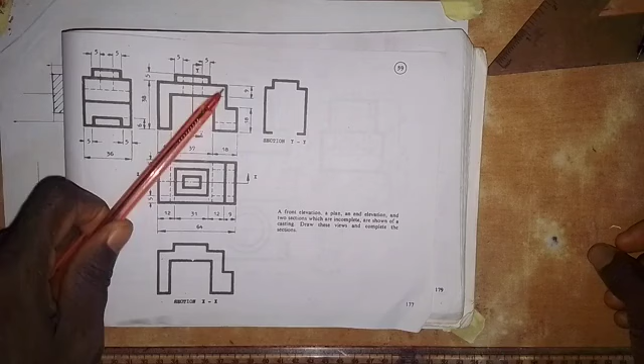So for the section XX, as the cutting plane goes like this on the plan, what we are to do is to draw the front elevation and we add the solid part. So though we have been given the part that we are to produce for section XX here, we still need to make use of dimensions on the front elevation to produce this, and then we add the solid part.

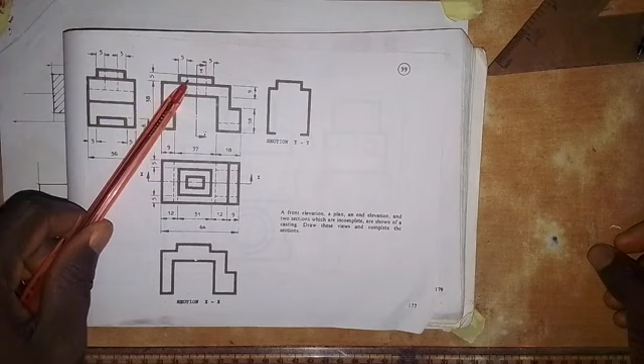Okay, and then we also have section YY. So this is the cutting plane YY here. So we cut off this part, so what we are going to do is to draw the end elevation, and then the part of it is given to us here that we are to draw. So let's start and see how this can be done.

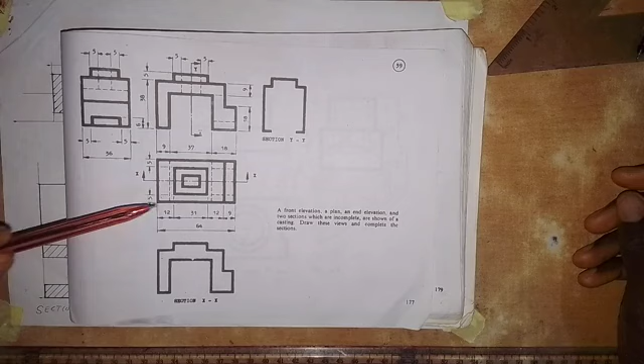So for section XX, as I said, this is the cutting plane. So we cut off this part as the arrows go in this direction. So we want to see what we have left on this surface. And then, looking at this, we have a rectangular hole here. So by the time we cut it, this line that is hidden within this will be exposed.

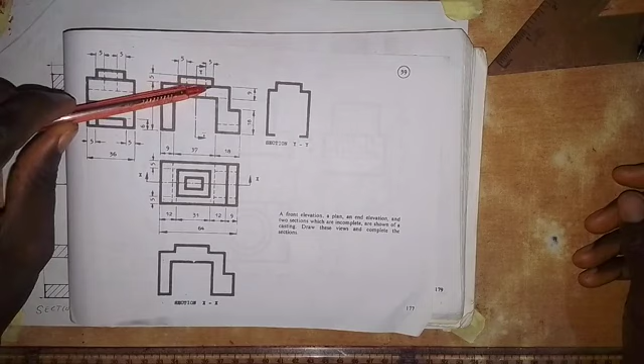So we are going to have it drawn with a thick line, and this line will not be there again. Okay, so we are going to draw it from here to here and from here to here, but it will not cover the whole of this space. As you can see here in the section XX that we are given, we are just to replicate what we have here, and then we need to add the solid part of it. So let's start and see how it goes.

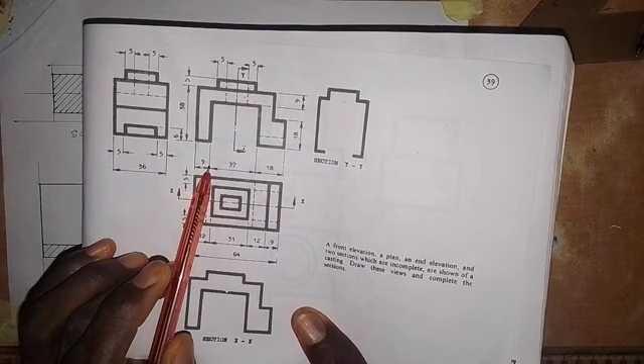So as we have from here, for the dimensions, from here to here is 9 millimeters. From here to here is 18 millimeters. From here to here is 37 millimeters. And the height from here up is 38 millimeters. From here to here is 5 millimeters.

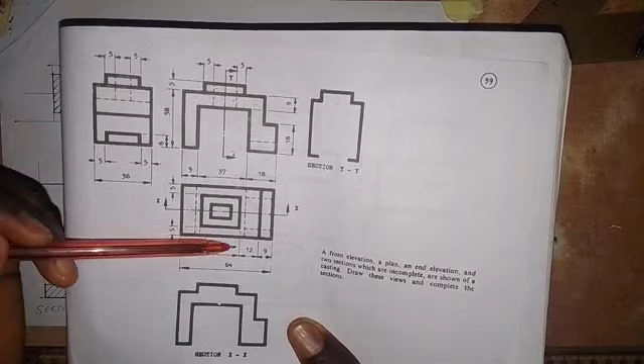And then we also have that from the center here, from here to here is 5. Okay, and from here to here is 5. And the length from here to here is 31 millimeters. It's given in the plan. So the total length is 64 as we have here.

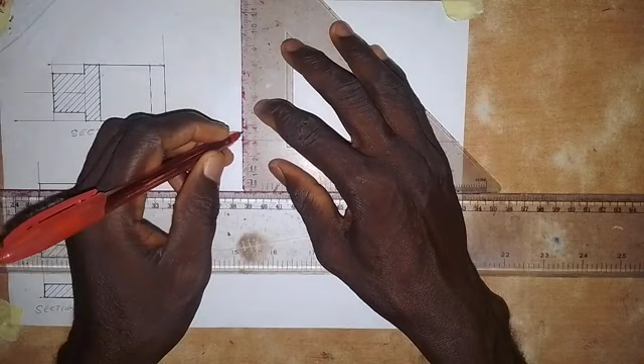Okay, so for the section XX, I'm going to draw a horizontal line here. So we draw a horizontal line like this. At this point, I'm going to draw a vertical line. So it goes up like this. Okay, so with this vertical line that I've drawn, I'm going to be taking measurements. I will take a measurement of 9 millimeters. So this is 9 millimeters here.

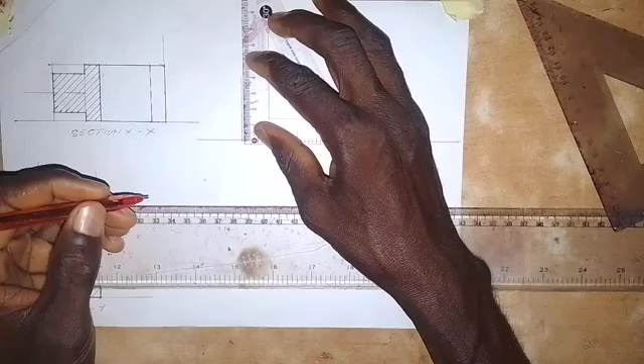Okay, so from this 9 millimeters, I will take 37 millimeters. So this is 37 millimeters here. After this 37, I'm going to take a measurement of 18 millimeters. So this is 18 millimeters here. Okay, so we have this. Then I will come on this line and take a measurement of 38 millimeters up. So let me extend this a bit.

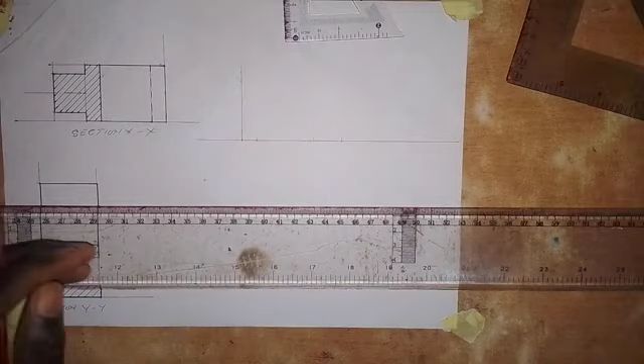38 millimeters. So this is 38 millimeters, and I will take 5 millimeters from here. So 5 millimeters up. So this is 5 millimeters. Okay. All right. So there is a particular dimension that I have to take: we have that from here to here is 18 millimeters, and from here to here is 9 millimeters. So from that 38 down, I will take 9 millimeters down, so it is within that 38.

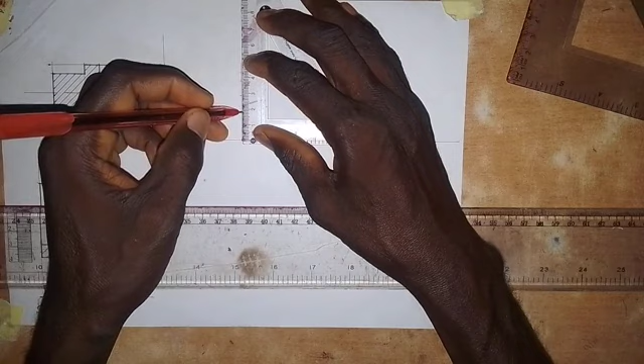So we have this, and I will come here and from here up, I will take 18 millimeters again. So this is 18 millimeters. Okay, so I'm going to draw horizontal lines from each of these points.

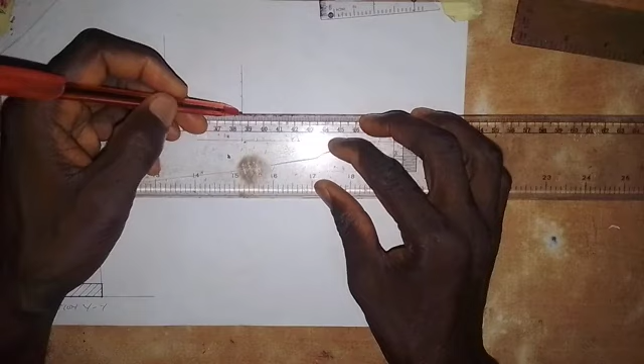So we'll draw a horizontal line from here. So draw a horizontal line from here to this side. Okay, then coming here, I will draw a horizontal line, and at this point I will draw a horizontal line here like this. Then coming up here, I will draw a horizontal line. All right, so then

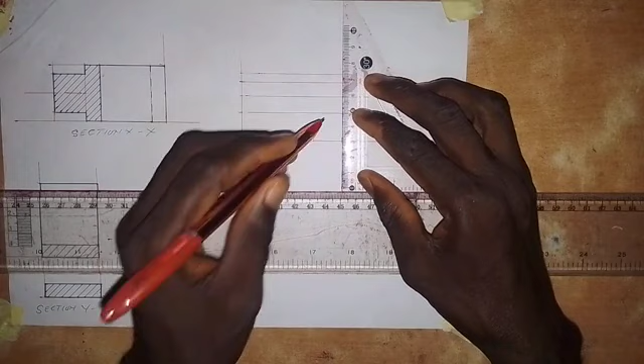Here I will draw a vertical line. So from this point I will draw a vertical line here. Okay, so this is a vertical line, and also at this point I will draw a vertical line that will touch this line. So based on what we are given, and also at this point I will draw a vertical line that will touch this line from here to here.

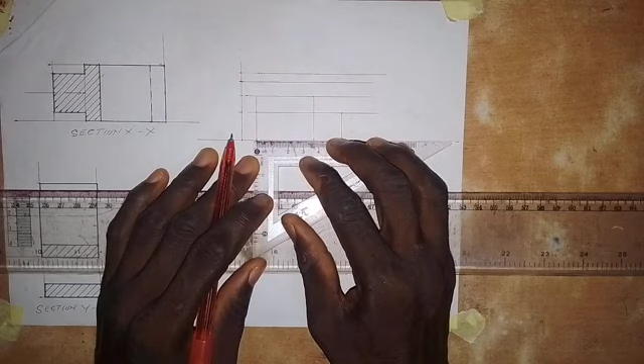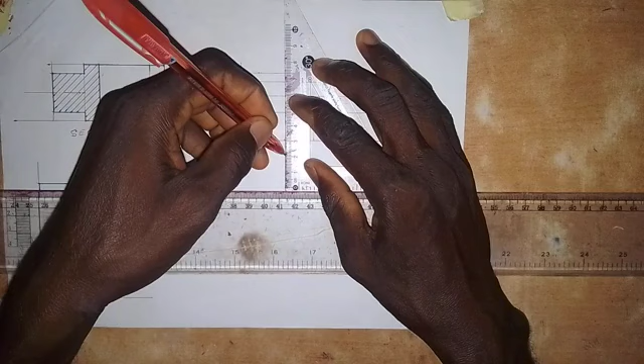So we have this. Okay, so then this 37 that we have in the middle, I'm going to divide it into two. So 37 by 2 will give us 18.5. So 18.5, this is 18, so 18.5 here. So I'm going to draw a vertical center line here. So we draw a vertical center line, so it goes like this. Okay, so we have that now.

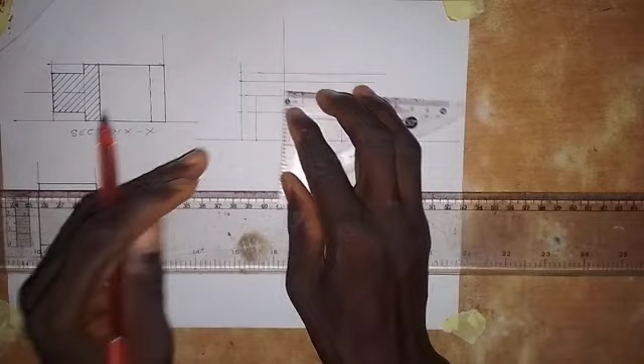Then from the center, we have that the total distance from here to here is 31. So if I divide 31 by 2, that will give me 15.5. So I have to take a measurement of 15.5. So I'll just set it like this. So this is 15.5, then 15.5, so making it 31 millimeters.

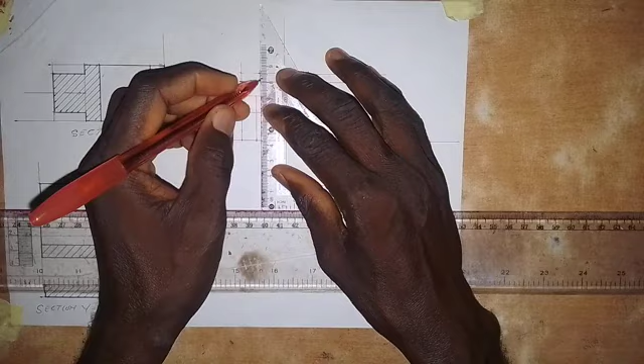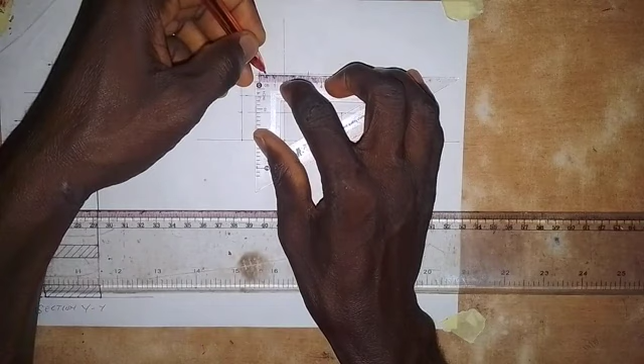Okay, so I'm going to draw a short vertical line to touch this one here, and also a short vertical line here to touch this one. So we have this. Okay, then for us to get the hole inside this, which is a rectangular hole, we have to take a measurement of 5 millimeters from here to here, because we are going to see this line and we are going to see this line. So I have to take 5 millimeters from this point to this side. This is 5 millimeters, and from here I will also take 5 millimeters.

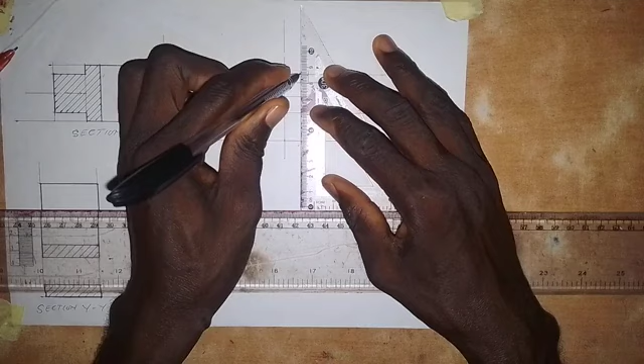So we are going to draw the line. Let's see where it ends. So it goes from this point to this point here. So we are going to stop it here. And then we are going to make it a thick line. So that is from here down. So we draw it, making it a thick line. And then here also we draw it, making it a thick line from here to here.

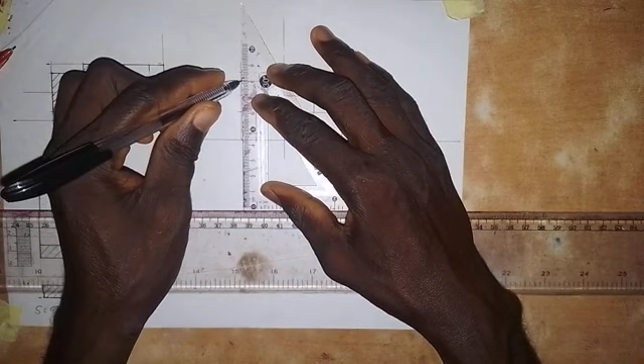And this line also, we have to make this line a thick line. Okay, so this line on this side will be a thick line, from here down to this point. Okay, so then this line from here, we draw it as a thick line from here down, and then this line will also be drawn, making it a thick line. So this comes down to this point here as a thick line. So we also make this a thick line from here down here.

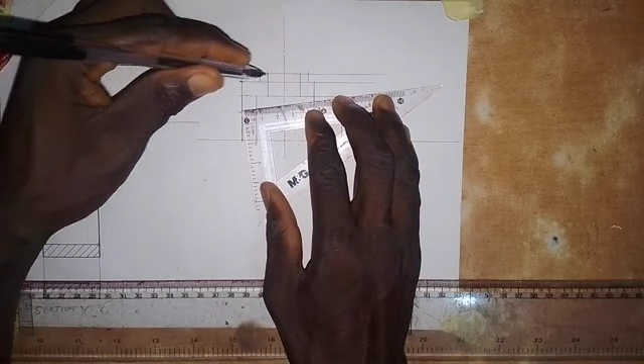And then this line we also... okay, so I'm looking at something here. All right, so from this 18 that we took here from here to here, we are taking 9 millimeters inward for us to draw this line, and that's what I've done while I paused the video.

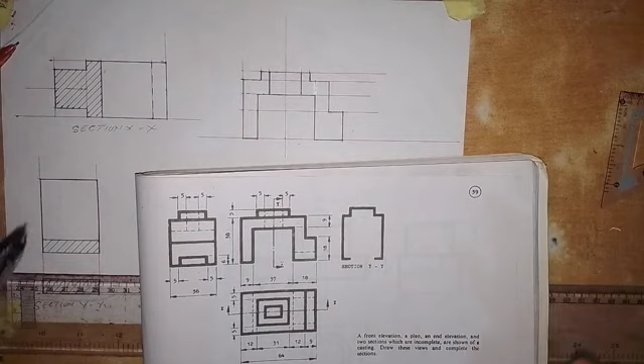So what we have now for the section XX is for us to produce the hatching lines on this surface. So this will not be hatched because there is a rectangular hole. The cutting plane does not touch this surface, so we leave it unhatched. But the rest from here down, we are going to hatch. So we make use of a 45 degree set square to produce the hatching lines.

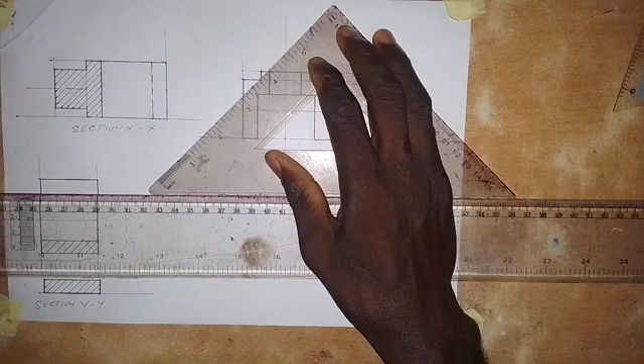As I said, hatching lines are drawn 45 degrees to the horizontal, and they are drawn with thin continuous lines, equally spaced. So you don't have to measure the space. All you have to do is use your eyes to take the distance between the hatching lines. Okay, so that is what I'm doing here, without taking the measurement of the space between the hatching lines. So we also hatch this, and then we hatch this surface.

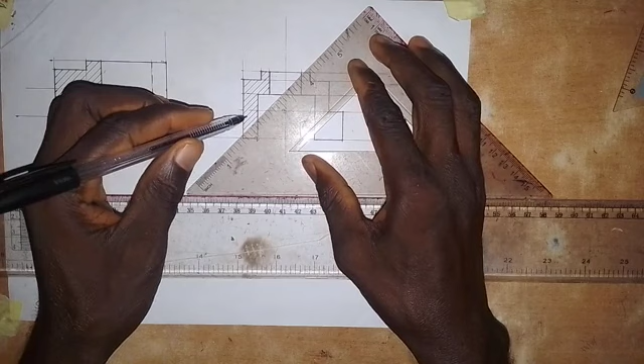All right, so it's as simple as I'm doing it here, so you don't have to think you can't do it. You can do it. Okay.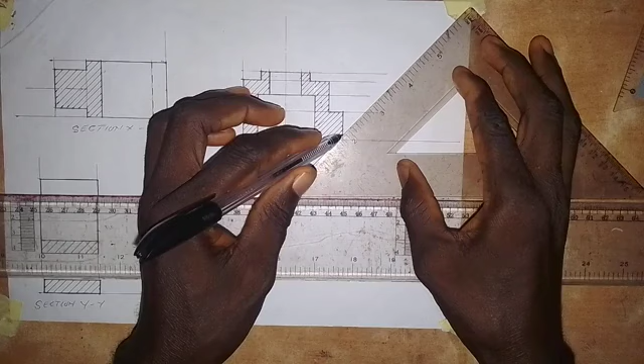All right, so we're about to complete this. Okay, so this is it. So this is section XX as we have here. So let's go and work on section YY.

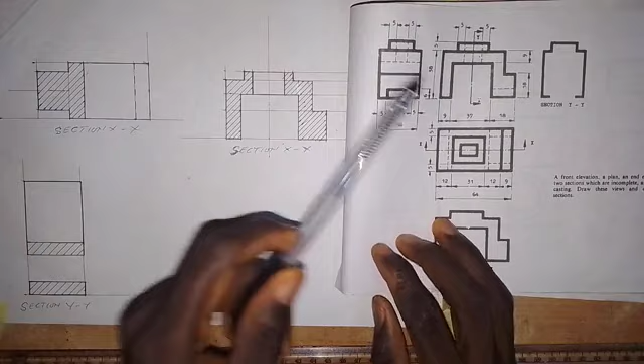So the cutting plane, we have it here, and the arrows go in this direction. So we remove this part. I want to see what we have left here on this face. Okay, so by the time we are looking at this from the plan, the cutting plane does not touch this face as we have here, so that's going to be left unhatched. And then this face, the cutting plane does not touch it, it's going to be left unhatched. Okay, let's work this out first.

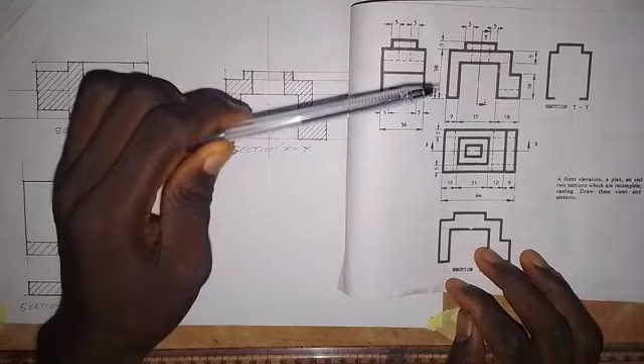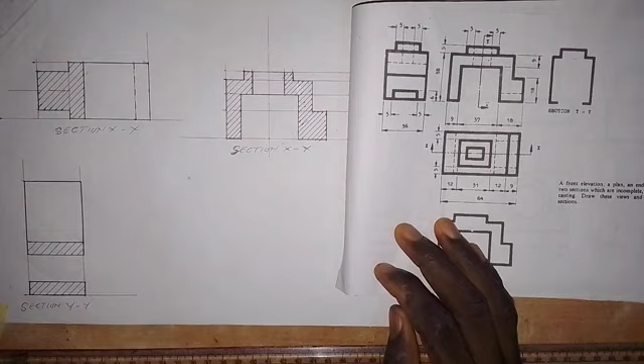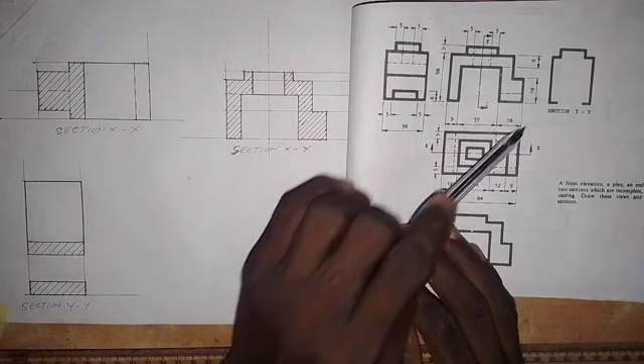So we are going to make use of dimensions on the end elevation. Looking at this as we have here, the distance from here to here is 36 millimeters. And then, other things that we are going to have here, there is a cut here. So we have a shape here, we are going to see it here. It is hidden here in the front elevation, so we are going to have it within this part here, so that's why this space is left.

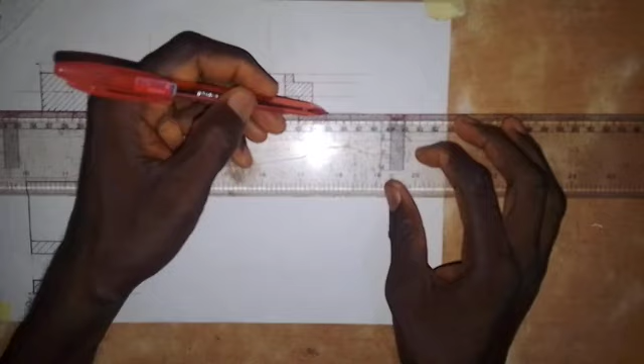Okay, so let's start and see. Let me make use of this space to do that. So what I have to do now, I'm going to project a line from this point to this side. I'll also project from here to this side here, and we also do the same thing here like this, and coming up here we draw this line to the right side. Okay, we have it here.

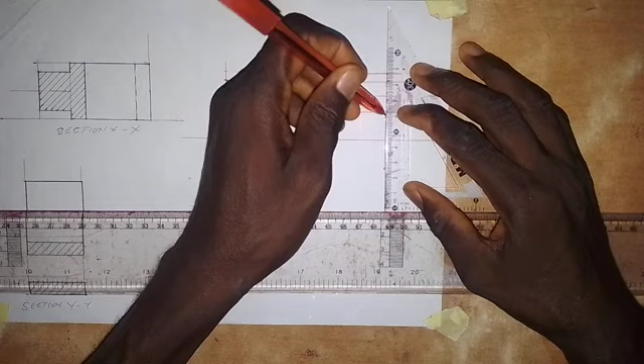So the next thing I'm going to do is draw a vertical center line here. Just move away a bit and draw a vertical center line like this. All right, so then 36 by 2 will give us 18. So I'll take a measurement of 18 millimeters from here to this side, and 18 millimeters to this side also.

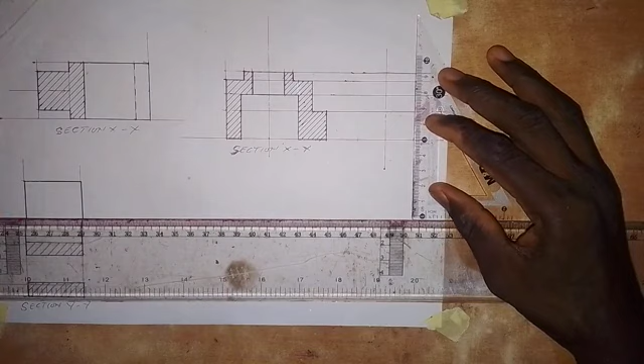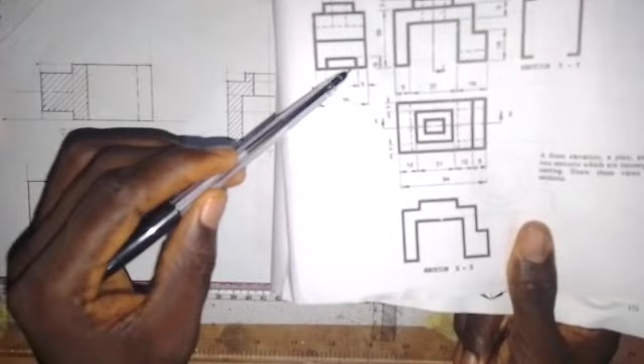So we are going to draw a vertical line from this end, and I'm going to make it a thick line at once. We draw a vertical line from this end up to this line, and then we draw from here up to this line here. So we also have this particular cut that we have here. This line that we see here, the object is being viewed in this direction. This is the right end elevation. So the line at this point is what they drew here.

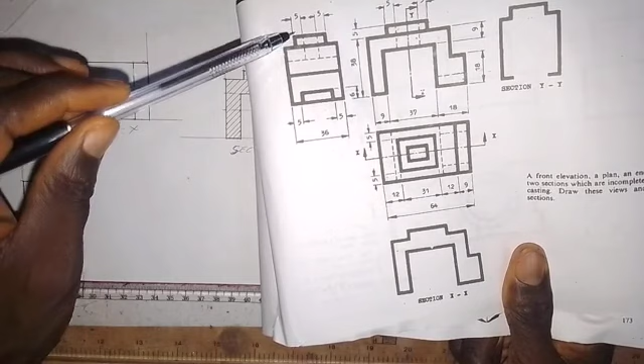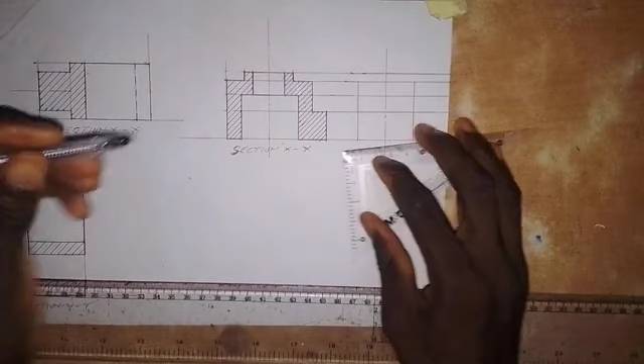Okay, so let's make it. So from here to here, I think it has the same dimension as this one that we have here. So we are going to take 5 from here to here and 5 from here to here. Whatever we have left will give us that. So I'll just come to this point here and take a measurement of 5 millimeters inward.

Okay, this is 5 millimeters, and also from here I'll take 5 millimeters inward. And then its distance from here to here is 6 millimeters. So I will come here and take a measurement of 6 millimeters. This is 6 millimeters here.

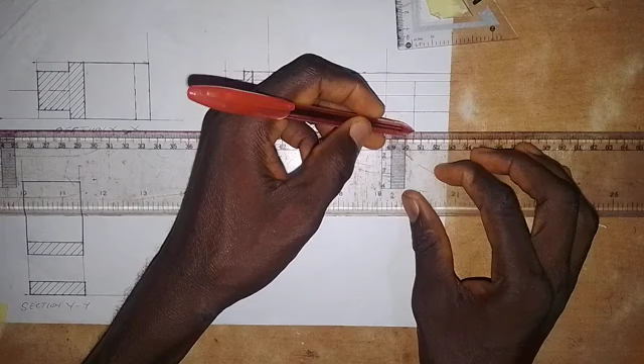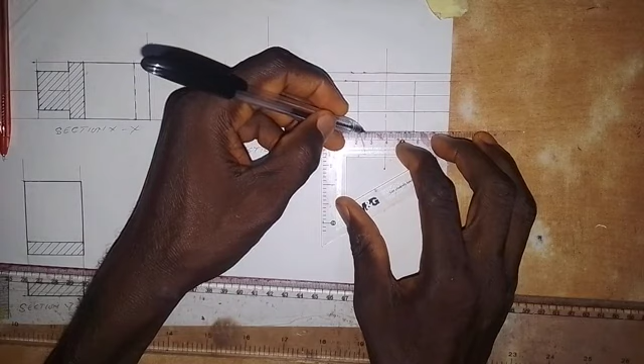So at this point I'm going to draw a horizontal line like this, and then here I will draw a vertical line, making it a thick line at once like this. Okay, so do the same thing here. Then I will make this line a thick line, from here to here. So we have this. The next thing that we are going to do is to work on this part that we have here, the upper part.

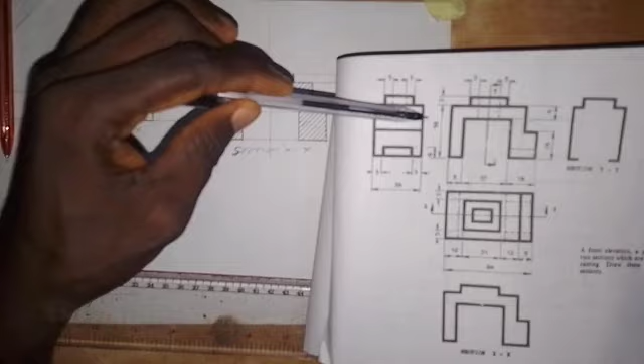Looking at this in this direction, this line here that is drawn short dashes, doing it in this direction, will now be a thick line. So we make it a thick line from here to this end.

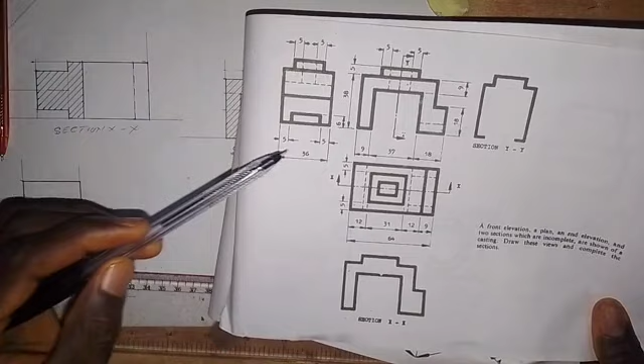Then we come up here, and we are going to take 5 from here to here, 5 from here to here, as I'm looking at it here. The 5 is here from here to here, and from here to here is 5. So we take 5 from here to this end. This is 5 millimeters, and then from this end here to here we take 5 millimeters.

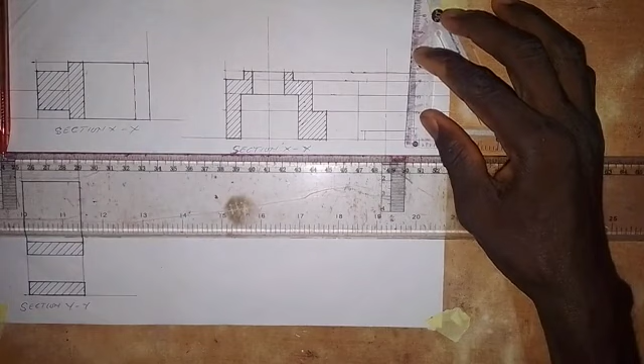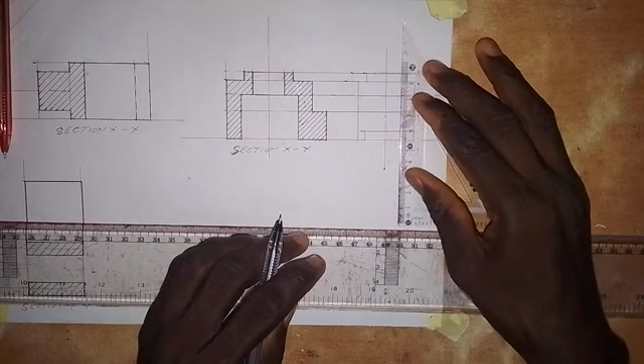So we draw a vertical line here like this, making it a thick line, and we also draw a vertical line. And then the inner one, for the rectangular hole, we take 5 inward. From here also we take 5 millimeters inward. This is 5. So here we draw the line as a thick line from here; it will touch this line here like this, and also we draw from here, it will touch this line like this.

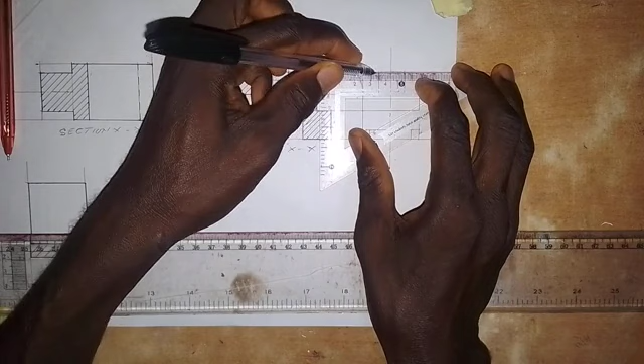Then the whole of this line, up here from here to this point, will be a thick line as we have it here. All right, what we are left with is to hatch this surface. This will not be hatched, because the cutting plane as we see it here does not touch this surface. So we only have to hatch the solid part that the cutting plane touches on this object.

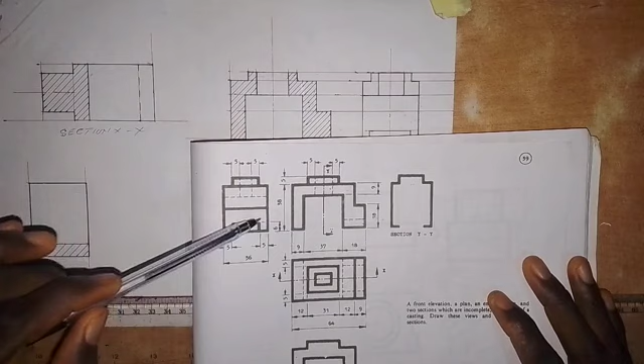Another thing that I see here is this line. This is the right end elevation, so there is a line at this point. It will be hidden in this sectional view, unlike in the right end elevation where it is shown drawn thick. But here, as we are looking at it in this direction, it will be hidden from us. So let's put it there as a short dashes line. Okay, so we have it like this.

Then let's go and produce the hatching lines. This surface will be left unhatched, so take note of that. As I said, hatching lines are drawn within continuous lines, at 45 degrees. So we hatch this also; they should be equally spaced. All right, so we have the section here.

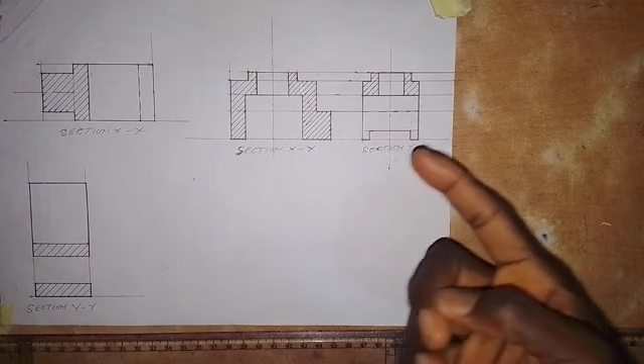So here we have section YY, so write section YY here. Yes, as simple as I've done it here.